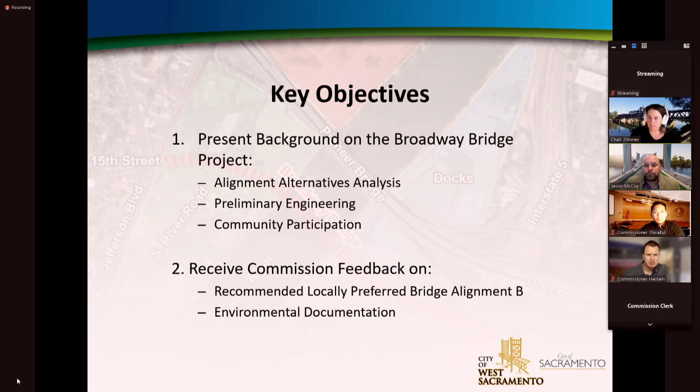There were several milestones accomplished well before this environmental document was put out on the street, or released to the public. First, there was the Sacramento Riverfront Master Plan. This is the master plan that looked at both sides of the Sacramento River, both in Sacramento and in West Sacramento along the waterfront. That Riverfront Master Plan was the initial document that identified the need for additional river crossings to improve connectivity between both cities beyond what already existed, which includes the historic I Street Bridge and the historic Tower Bridge, the gold bridge between Sacramento and Tower Bridge Gateway in West Sacramento.

As a follow-up, there was the Sacramento River Crossings Alternative Study back in 2011. Some of you might recall I've presented this before. I believe Chair Zimmer, you were present. We talked about these alternative crossings in relation to the feasibility study conducted for Broadway Bridge and for the I Street Bridge. This Sacramento River Crossings Alternative Study identified 8 potential bridge crossings to serve what were identified as the North, Central, and South market areas.

The easiest way to remember is the North market area would be north of the I Street Bridge. The center goes from the existing I Street Bridge to Pioneer Bridge, which is US 50. And south of US 50 is the South market area. The city councils of both cities accepted that river crossings alternative study and directed staff to examine both the North Market and South Market crossing alternatives.

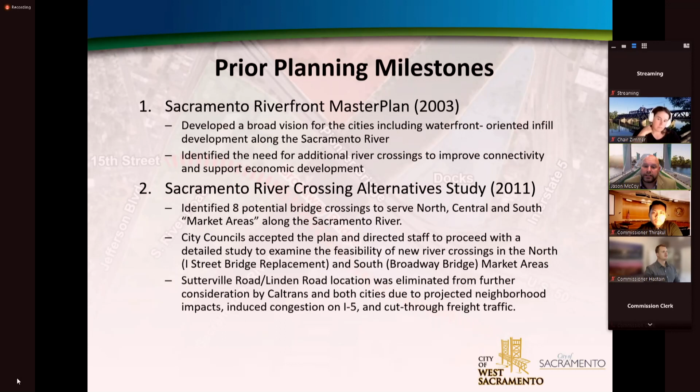Next slide. This is an example of those 8 different crossings that were identified. The ones we're focusing on today include number 2, the location of the I Street Bridge Replacement Project, and number 6, the location of Broadway Bridge. This was identified as a neighborhood-friendly bridge. Both of these were intended to serve local users, primarily not for regional travel but for local travel. They were crossings not meant to connect primarily to residential streets, and designed to be bicycle and pedestrian friendly. Next slide, please.

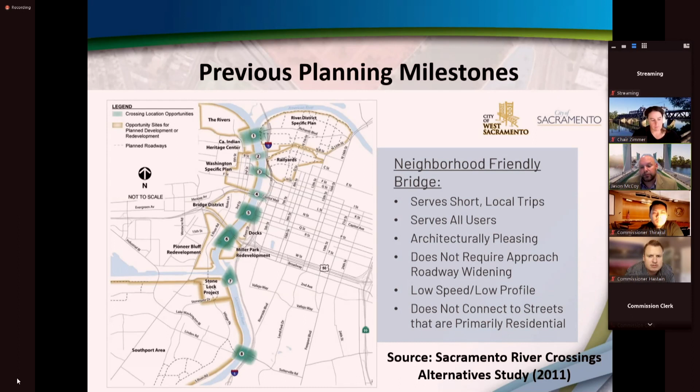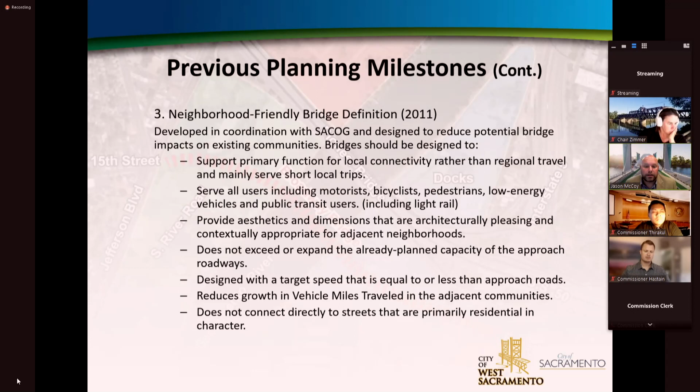Again, this is the identification of the neighborhood friendly bridge concept. It was actually adopted by the city of Sacramento as a policy in 2011. It was never formally adopted by the city of West Sacramento, but West Sacramento has accepted Sacramento's neighborhood friendly bridge definition and integrated it into the goals for all of our local bridge crossings. Next slide, please.

We also had some funding awards received. SACOG's Regional Funding Program Award in 2013 provided $442,700. In addition to the local match for that, we had approximately $500,000 in funding in order to prepare the feasibility study for Broadway Bridge. In addition, we received $1.5 million in federal funding from the Tiger 6 discretionary grant program.

Some of you may now know it as BUILD. It has since been changed once again; it's now identified as RAISE. These are discretionary grants for capital improvements. We matched that $1.5 million with a $1.5 million contribution, $750,000 from each city, in order to secure that funding.

Next, we had the Pioneer Bluff Transition Plan, completed in 2014, where we looked at the riverfront property along South River Road. This was a project led by our Economic Development Department, looking to change the industrial land uses currently existing in the Pioneer Bluff area to transit-oriented urban infill. Next slide, please.

So there's the feasibility study phase that I had mentioned. We looked at a range of alternatives in that feasibility study. We also had some pretty robust community outreach, gathered a lot of stakeholder feedback, and looked at the scope, schedule, and cost associated with the Broadway Bridge.

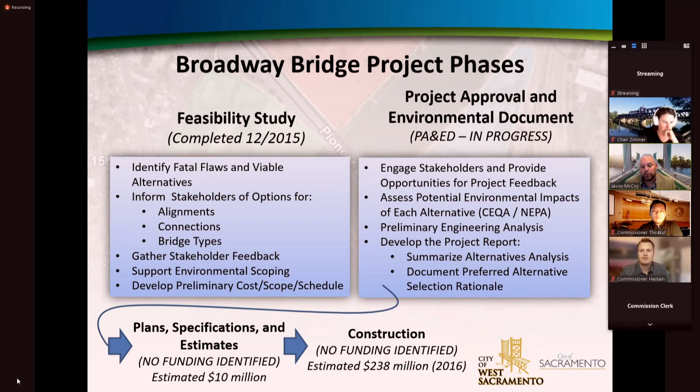The estimated cost of PS&E is $10 million. We are currently working to try to secure that funding. Construction, we have not identified funding. At that time, it was estimated around $238 million for the construction phase. Next slide, please.

So these are the alignments that were analyzed from the feasibility study through the early stages of the environmental impact report. You can see we have alignments A through D. However, the C alignment was looked at in 3 different configurations. There were 2 separate configurations that were brought forward in the feasibility study. The 3rd configuration came forward as a refinement to those 2 alternatives in order to avoid items like the Kinder Morgan pipeline, which is a gas pipeline that's located underneath the river.

We also worked with the U.S. Coast Guard to ensure that the required navigational opening of 170 feet is adhered to. That actually started to expand when you start looking at the C3 alignment and the D alignment, where that 170 foot needs to continue to widen in order to accommodate the river traffic.

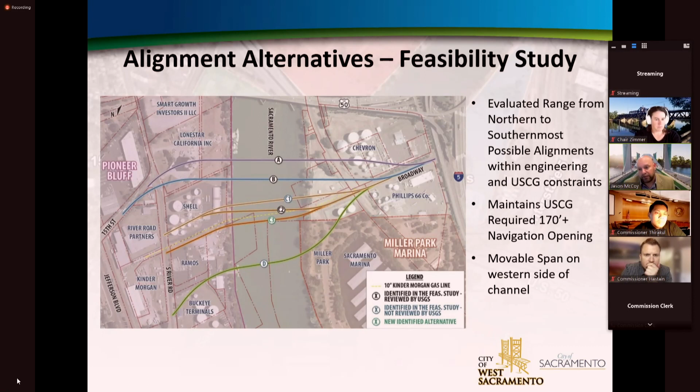Next slide, please. So there are several bridge types that were evaluated in the feasibility study and then evaluated further in the engineer's report for the environmental document. The important thing to remember here is that with either the B alignment or the C alignment, and I'll get into why the A and Ds were eliminated, the vertical lift, the double leaf bascule type, and the swing bridge are all appropriate bridges that fall within the limits for the 170-foot span. The vertical lift, the 170 feet, considerations for that are best for light rail.

We are making each one of these bridges, both the I Street Bridge Replacement Project and Broadway Bridge Project, accessible to light rail in the future.

The double leaf bascule has some limitations when it comes to the rail locking in the center when you bring a bridge down. However, there are special locks that can be utilized. The 170-foot width for a double leaf bascule is right at the end of the range. So it becomes more expensive as you start to go outside of the range for some of these bridge type alternatives.

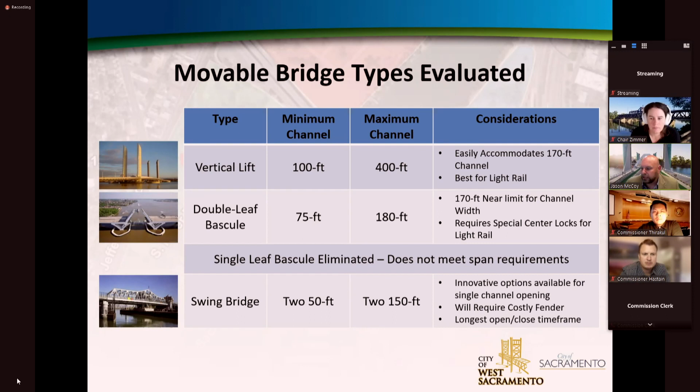And then there's the swing bridge, as many of you know, as our current I Street Bridge. That would also be feasible. However, there are some cost considerations when looking at implementation. All of these different bridge types would be evaluated in the final design phase as we move forward. Next slide.

Back when the feasibility study was put together and adopted, there were several design features that were looked at. We looked at the cross-section of this bridge in the same way that we looked at the cross-section for the I Street Bridge Replacement Project, and these were identical as far as the approved cross-section. This is a 2-lane configuration with a center turn median. It also includes dual separated 12-foot multi-use pathways on the outside of the vehicle traffic way.

There are 6-foot bike lanes with 3-foot vehicle buffer zones. Those buffer zones are provided to provide a low stress environment for bicycle riders to cross the bridge. There's also 12-foot lanes that are rail and transit ready. So in other words, as I had mentioned, they'll be designed to accommodate buses, potential BRT, as well as rail. And again, there's multiple bridge types that were evaluated as part of the span.

One of the items that came up several times as a comment from folks is how are these buffers going to be designed, and how will we accommodate pedestrians as well as other modes like scooters and bike share? All of this is part of the final design phase. Elements such as whether there would be a raised buffer, a hardscape buffer, a curb, or delineators will be ironed out as we get into the final design phase.

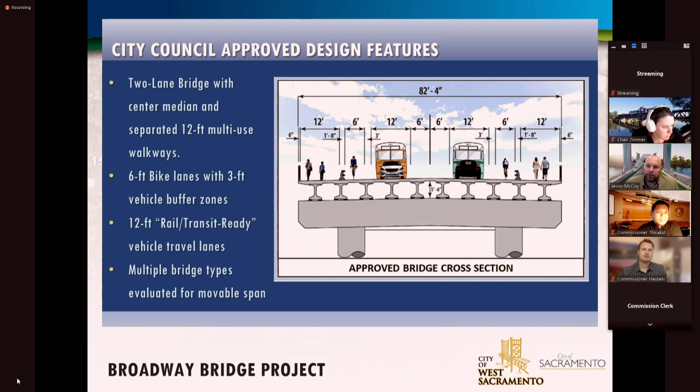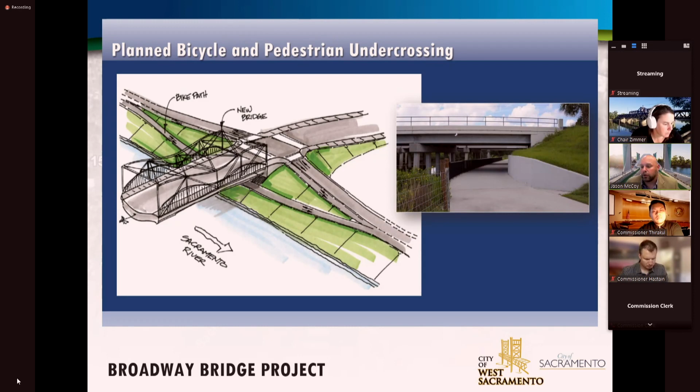One thing that's pretty important to folks is ensuring that our bicycle and pedestrian paths are low stress, and that we would accommodate traffic going underneath this bridge crossing so there would be continuous use of the bicycle and pedestrian trail along the waterfronts on both sides of the river. As this slide shows, we are going to be accommodating just that. Next slide, please.

There have been a lot of questions over the years about traffic volumes. From the feasibility study all the way to where we are now, we have analyzed traffic, primarily looking at what traffic does from Broadway into West Sacramento. With these key alternatives, traffic can either flow onto both South River Road and 15th Street, or dead end into South River Road, which is also 5th Street once you head north. One consideration is that there are greater traffic impacts associated with dead ending directly into South River Road, as opposed to providing a dual arterial outlet via Jefferson Boulevard and South River Road.

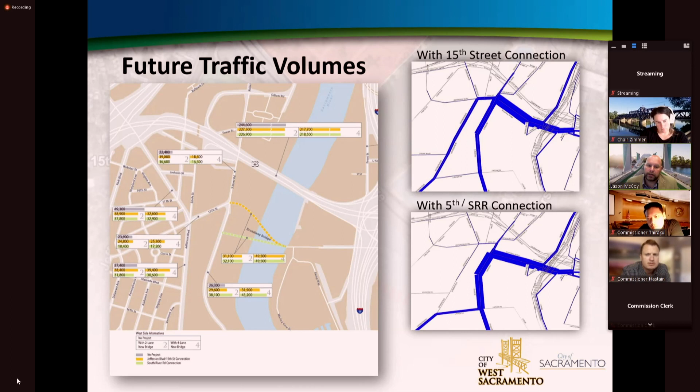So we have found this several times. We've already done traffic analyses twice for this project, both with the feasibility study and again when we developed the road network for Pioneer Bluff. Each time we have seen that the traffic impact is significantly lessened when we have a direct 15th Street to Jefferson Boulevard connection. Next slide, please.

I mentioned the road network in Pioneer Bluff. We had not, as part of the feasibility study, ironed out what the roads will actually look like in Pioneer Bluff, and it was not part of the Broadway Bridge project to analyze that. So the city of West Sacramento's Economic Development Department, as well as our own transportation group, worked together to devise how the road network would be laid out and what the alternatives could possibly be. Those were put together in different conceptual layouts and presented to the city council in early 2018. The city council looked at about four different alternatives, evaluated each one, and then selected the preferred alternative for the road network within Pioneer Bluff.

Then the Broadway Bridge team took that road network approved by the city council and dropped it into our regional traffic model to determine what the impacts would be with each of these alignments. Based on that, the analysis was included in the environmental document, and the impacts were identified and listed. Some of what we see with the traffic analysis and the future road network, as shown here, is that alignments A, B, and D had a less than significant impact. However, alignment C, which as I mentioned dead ends into South River Road, would result in excessive delay, creating a significant impact.

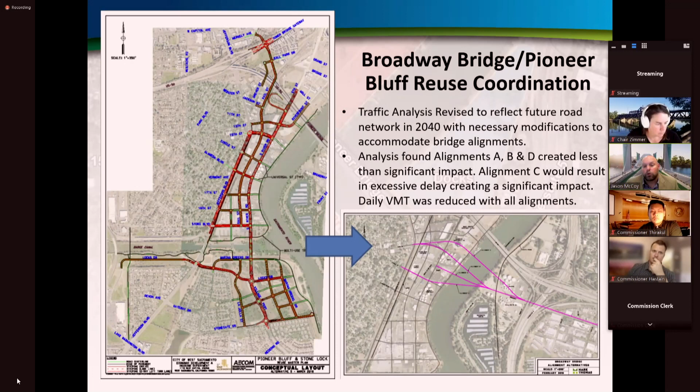The other thing to note is that the daily vehicle miles traveled was actually reduced with all alignments, as the majority of traffic using Broadway Bridge is looking to travel between the downtown core and Southport in West Sacramento. Right now, folks have to use Pioneer Bridge, which is the freeway, the state highway system, to get over the Sacramento River, or extend further north to use Tower Bridge, or even further north to use the I Street Bridge. Since a lot of the traffic will be traveling between downtown and Southport, the sooner you have a connection going across the Sacramento River, the more reduction in vehicle miles traveled you see. Next slide, please.

Alignments considered but eliminated are identified in the environmental document. Alignment A, which was the northernmost alignment closest to US 50, the Pioneer Bridge, had several impacts. It went from 15th Street across the Cemex property, across the river, and through the Chevron refinery. This conflicted with a lot of our planned development in both Pioneer Bluff and the Bridge District, and was also inconsistent with the West Broadway specific plan.

It also required a realignment of the existing railroad crossing on Broadway in Sacramento, and a change in the elevation of about 1,000 feet of those tracks, which is a significant impact and a significant cost implication.

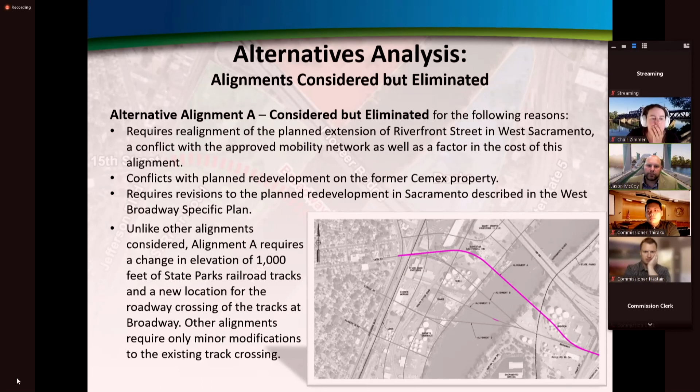Alternative alignment D was considered and eliminated because it actually would result in the volume of traffic going to Circle Street in West Sacramento. As folks know, Circle Street is a local residential roadway, not an arterial.

It would conflict with the neighborhood-friendly bridge policy. It also required that Circle Street be a signalized intersection and actually widened to accommodate traffic turning movements. Again, this is not consistent with the neighborhood-friendly bridge policy. It also had the longest span length, about 35% longer than alignment B, 28% longer than alignment C.

In addition, the US Coast Guard identified that this was not an alignment that they would find acceptable, even though it did fall within the limits that were initially mentioned. The skew of the alignment was determined to be too significant for river users to navigate through.

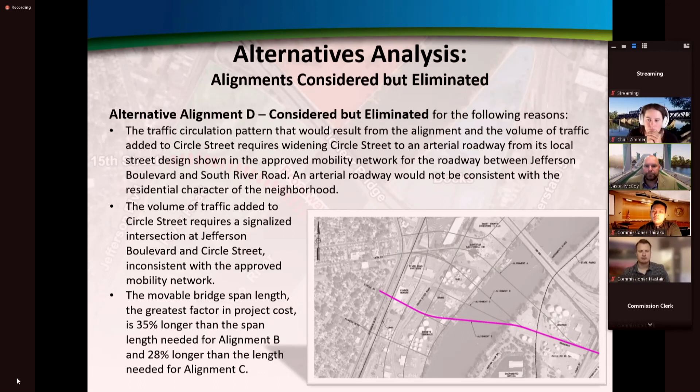The result of our analysis came down to two alignments: alternative B, which is the locally preferred alignment, and alternative C, which is refined from our other C alignments. As I mentioned, the C alignment does result in a significant impact in traffic, whereas alternative B does not.

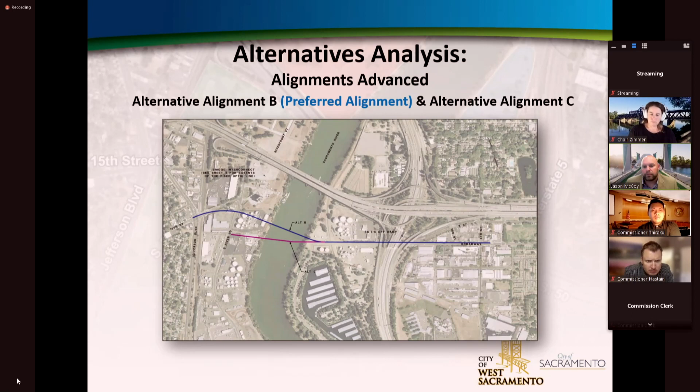This is the preliminary engineering that was put together for alignment B, available in the environmental document. This is alternative alignment C, also in the environmental document and analyzed.

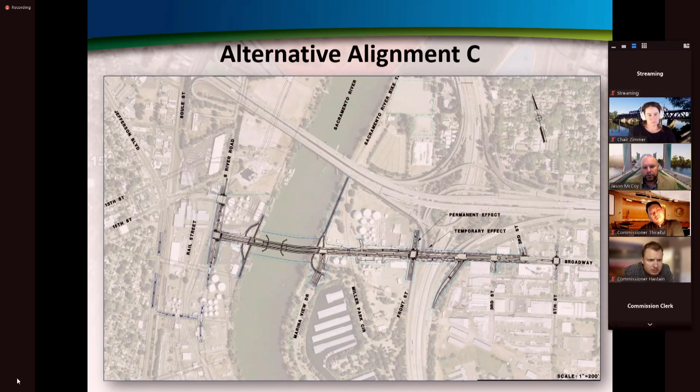The recommended preferred alignment was identified by both the cities of West Sacramento and Sacramento, and is subject to public review, as we're in right now, and comment, and ultimately city council approval.

Alternative B satisfies the objectives of the project better than C in that it requires fewer changes to the mobility network, results in greater future congestion relief, causes a lesser amount of permanent and temporary impacts on both sensitive terrestrial and aquatic habitats, and produces significantly less VMT than alignment C in year 2040 as well.

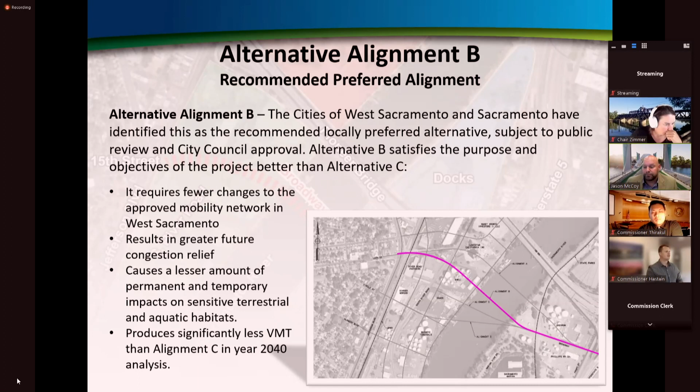Bridge architectural design came up pretty often at our most recent public meeting. As I mentioned, actual design elements will be subject to evaluation based on community feedback, functional requirements, cost effectiveness, and funding availability, and will be analyzed in the final design phase of the project.

These different design elements that are not part of this current phase include the selected bridge type, whether it's bascule, vertical lift, a swing bridge, or a rolling double leaf bascule. The mechanical and structural elements, such as girder type: are we talking about steel girder, concrete, or is it an arch bridge?

The pedestrian and bicyclist amenities, such as benches and where they're going to be located, bike parking, belvederes which are lookouts, the railing design, landscape, hardscape design, public art, wayfinding, and bike buffer design, all of these different elements will be addressed in the final design phase of the project following community feedback and discussion on the architecture for the bridge itself.

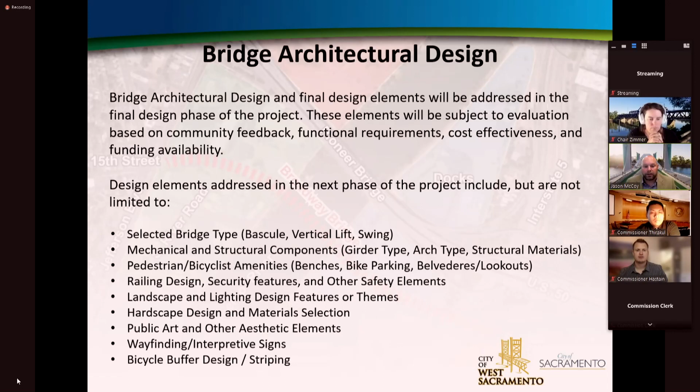There are a number of related projects that were taken into consideration for this project, and we have had ongoing coordination throughout. The Riverfront Street Extension is a project that would connect ultimately 5th Street with Riverfront Street through the CEMEX property. That is an ongoing project as part of our engineering division.

The Broadway Complete Streets Plan, which is looking at traffic calming and pedestrian amenities and designing for bicycles and pedestrians along Broadway, is an ongoing Sacramento project.

The West Broadway Specific Plan was just approved by the city of Sacramento, covering the entire area including the marina and Upper Land Park area, all the way to where the Broadway Complete Streets Plan ends. That was approved about 3 months ago and had an environmental impact report as well.

I had mentioned the Pioneer Bluff and Stone Lock reuse plan and the ongoing specific plan where we have the entire street grid network that was approved by the city council and has been moved into, well, I think it's still moving into the specific plan phase.

The Riverwalk Trail extension: we continue to look for opportunities to extend the Riverwalk Trail south all the way to the Deepwater Channel.

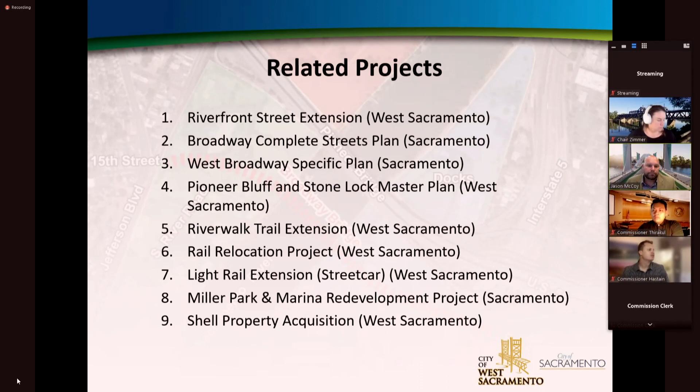We've had some community participation, a lot of robust discussion and outreach amongst community members. We started back in 2015 with a community open house as part of the work we were doing with the feasibility study. We had an environmental scoping meeting back in July 2017, with more than 70 community members attending in the city of Sacramento. By the way, we've been trading off between the city of Sacramento and the city of West Sacramento to enable folks who cannot make it over the river to attend in either city.

We had a very robust outreach event, some of you may have attended, called the Riverfront Renaissance Community Outreach Event in June of 2017. At this event, we took the courtyard site off of South River Road, put up a very large tent, and had staff from both cities attending with over 235 community members there.

We had community leaders from both cities, and we introduced a number of projects happening in both cities, all the way from the I Street Bridge Replacement Project south to include the Broadway Complete Streets, Broadway Bridge, Miller Park Marina, as well as some of the other work going on in Sacramento at the time.

We've had a number of city council and commission meetings held to talk about the project, and I've got them listed here.

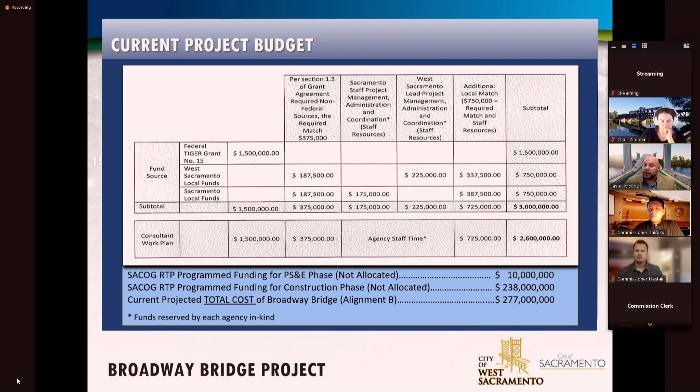So as I mentioned, we are right now in the PAED phase, which is the project report phase, as shown here. In order to proceed with the subsequent phases, we have to certify our environmental document. Once we have that environmental document and our preliminary engineering certified, then we can start seeking additional funds for the plan specifications and estimates phase, right-of-way acquisition, and construction.

I have been working with Congresswoman Matsui's staff to try to identify funding for the final design phase. We were very successful, with her leadership and the leadership of our city council and Sacramento City Council, in obtaining $15 million in the Transportation, Housing, and Urban Development authorization bill currently in Congress, and we hope it will be signed by President Biden. That would be $15 million for the I Street Bridge replacement project, and I believe we also have $4.15 million allocated to the I Street Bridge deck conversion project.

That's the project to convert the top deck of the historic bridge to a bicycle and pedestrian facility once the new bridge is built. We had been working to try to secure additional funding for the final design, but unfortunately it did not make it through the bill. So we will continue to seek other funding.

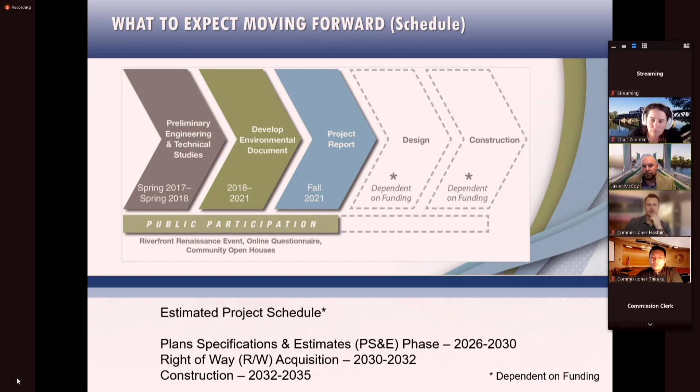So the next steps, as I mentioned, we had our Broadway Bridge virtual open house that was completed. Right now, you are receiving at the TMI Commission our report. We will be going to the West Sacramento City Council for their presentation. And by the way, I have to apologize because your staff report did say council a couple of times at the beginning when it should have said commission. I noticed that when I went back through and reread it. Both these reports were developed together, and City Council will be hearing the same presentation that you're receiving today.

After we've closed the public comment period on August 23rd, our staff is going to work with our consultant team, and we're going to respond to all the comments that were received. That is going to be compiled into what will be published as the final environmental impact report, environmental assessment. Then we'll be going to the City Council to seek final approvals and certification of the environmental document. Next slide, please. That concludes the presentation.

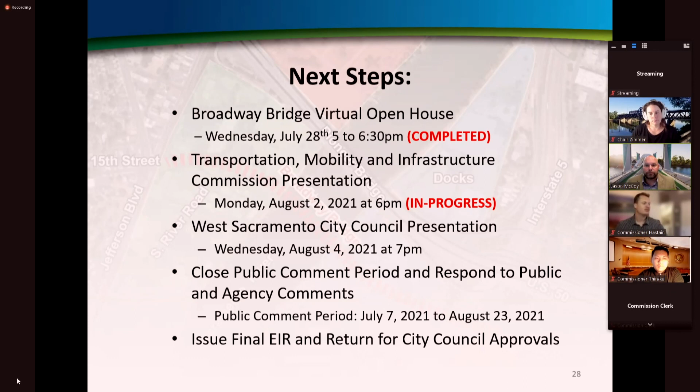I'm happy to take any questions that you have. Silly question. Thanks for the presentation, it was great. It's all the details I wanted.

Does it normally take 18 years to build a bridge? Yes, for a bridge of this size, this scale, and this cost, they definitely require an extended period of time to do the planning and the approvals, the engineering, and ultimately construction. To put it in context, the I Street Bridge started about the same time.

We are just entering into the final design phase. As I said, we are hoping to secure the $15 million through the federal appropriation, the THUD bill. That will give us sufficient funding to move through both the final design and the property acquisition phase. There is some property acquisition and relocation required as part of that project.

So if this was going fast, and we suddenly had a majority of this funding available, then the final design phase takes about 2 years, about 18 months for the right-of-way process, and about 3 years for construction. However, before you can move forward with any of that, you must secure the funding. That required both cities to develop cooperative agreements, and take multi-year efforts to seek, gather, and get appropriated all the funding required.